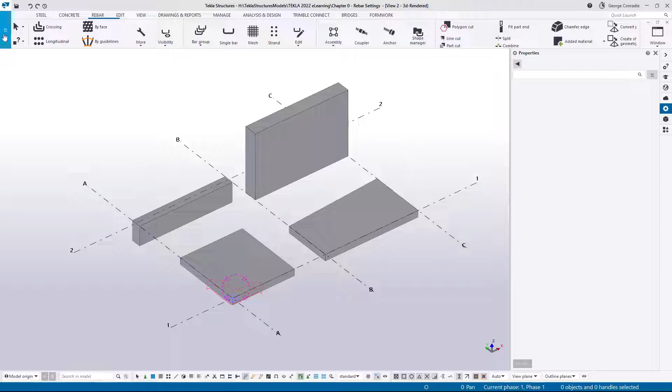Under the File menu, if we go to Settings Options, there are four things I'd really like to go through. The first one is clash detection - the check on cover and the check rebar on rebar. And then I also want to go through the three tabs of the rebar sets.

Now, the cover and locations we haven't dealt with yet - I'll discuss that in detail. On the general, I've discussed that a little bit, but I'll do a bit more detail on that in this video. On the rounding and tapering, I've actually done an in-depth video on that, I think chapter 6, video 4, where I deal with tapered slabs. I've done an in-depth discussion on how these settings work, so I'll do a brief explanation here, but please go see that video, chapter 6 video 4, for an in-depth explanation of how to work with tapers and slabs.

With that, what I'd like to do is start with the clash check. I think if we isolate, we just need this slab for this explanation. So I'll grab that slab - let me just make sure that's select all elements. If I grab that slab, right click, fit work in all views. We've got our slab isolated.

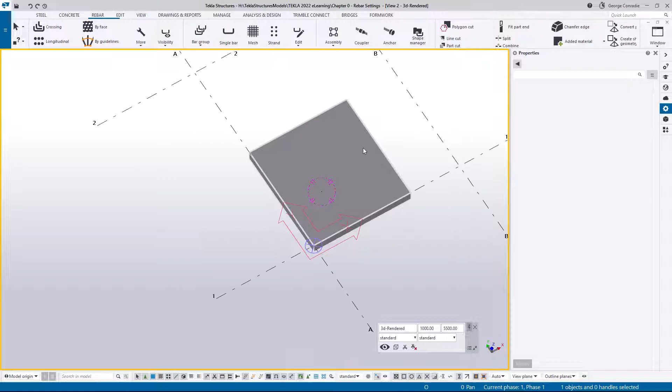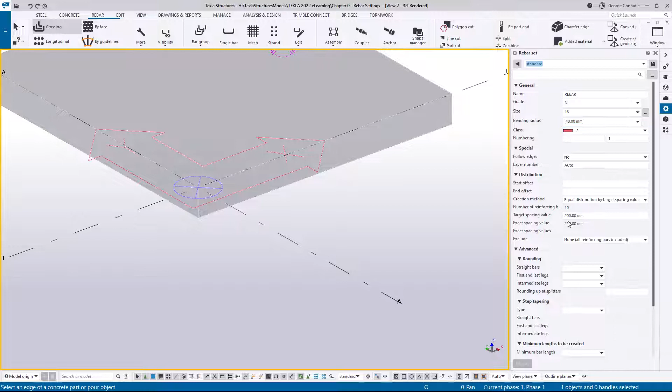What I'd like to do is the rebar sets and the rebar groups, because they work slightly differently. If I select the rebar set and I just load my defaults - and I think for this exercise, maybe we go to a 16 bar because it just shows up better in the video, 16 millimeter main. I'll make it red, that's fine. And the spacing I'll go 300.

I'll hover over the edge of the bar, pick the top, the side, and the bottom. I'll leave that one open. And before I accept the bar, I'll actually pull this back to say 600 mils, just to create like a U-bar type of bar, edge reinforcement U-bar. And then I'll say OK - that will create the U-bar with 600 legs for us.

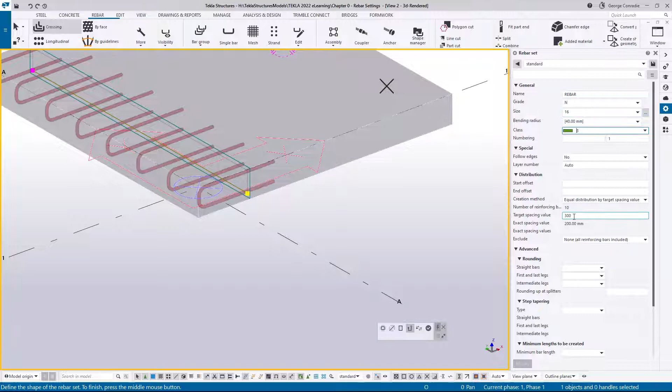While I'm still in the command, I'll just hover in this direction and pick the bottom. For the color, I'll just make it a different color, say for instance 3. I'll pick the same size, 16. Distribution 300 is OK, and then before I accept that, I'll just go adjust guideline and pull this edge of the guideline down to the edge of this reinforcement and say OK. So it creates 3 bars for us on that U-bar like edge reinforcement, for instance. It's just a simple example, but these are rebar sets now.

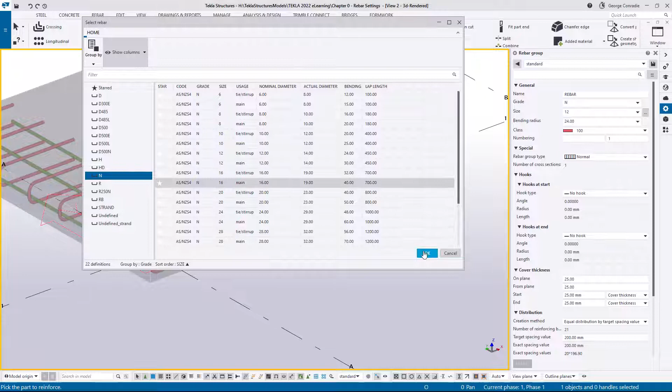Now on the other side, what I will do is go for group, so rebar group, and again just load my default settings. I'll go to the 16 main to keep it the same. Let's keep it the red bar. Then for the cover, 25 is good. For the start and end, what I'll do is actually force a leg length here for the first and the last - I'll force a 600 by 600 leg for the start and end leg. And also the spacing is 300, just to suit the other side.

I'll pick the reinforcement slab and then I'll just draw a bar shape that looks like a U. I'm not too worried about the legs because it's going to be overwritten. Middle mouse click, and then for the spacing line, I'll just pick this edge of the slab to the opposite edge, and that will now create a U bar, same as the other side.

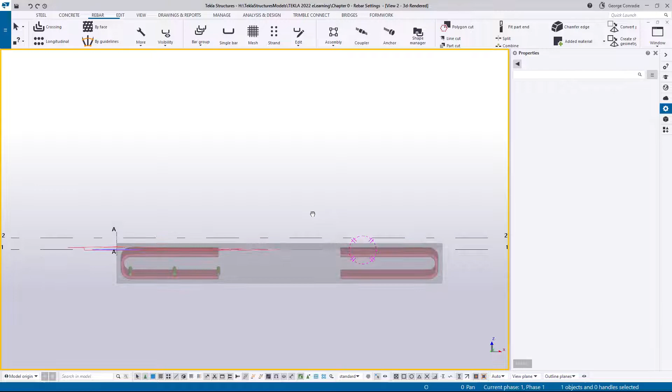Now for the straight bar that sits on top of it, we can just engage the rebar group again. In here we'll have to go 25 as a cover, and this will be 25 as a cover again. And then for the on-plane and from-plane settings, we'll deal with that now.

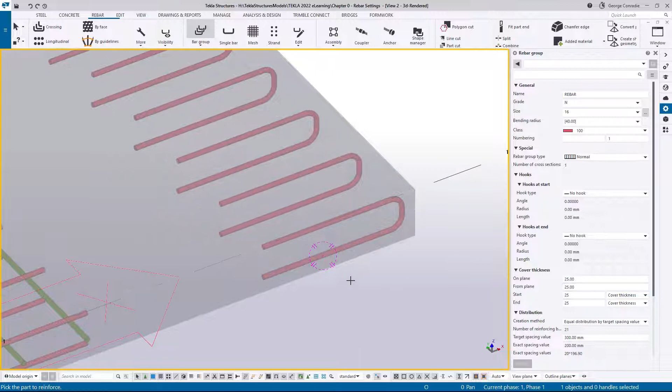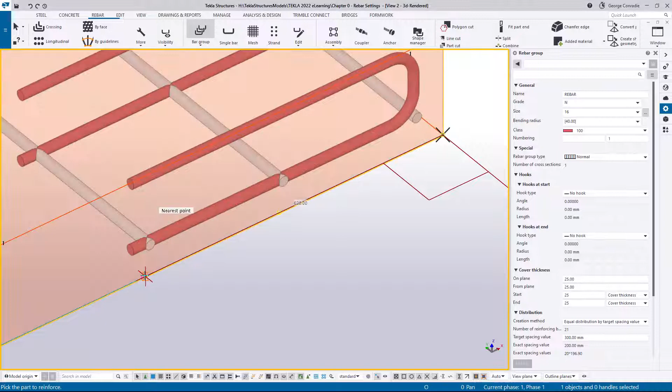So what I will do here is actually say we want to reinforce this concrete. We want to go from this edge of the concrete to the opposite edge, perpendicular. Middle mouse to accept the shape. And now for our spacing line, once again we will go from this edge all the way to 625. Right, so that will give us that.

So now if I click on this, here is already an indication of the power of the rebar sets, because it does automatic layering for us. With rebar groups, we've got to manually do it because it's governed by the cover that you plug in. So first of all, we'll adjust the height - we need to add 19 millimeters to the cover of 25, so that gives us 44.

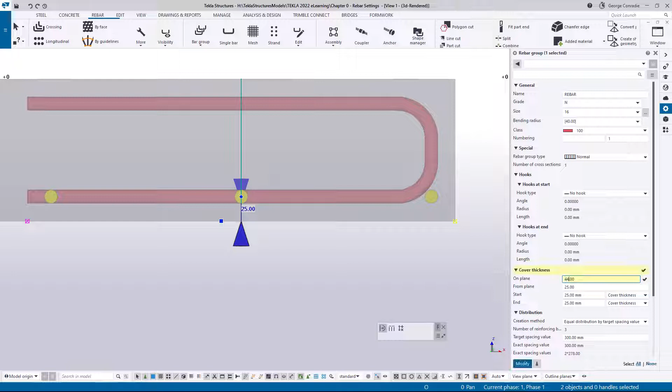So if I say the on-plane setting is 44, enter, that will pick up the bar so it sits exactly on top of us. And for the end here, I'll do a space 0 there to address the end of the bar, so it puts it right on the end there.

And for this side here, I'm going to do 25 cover plus the 19, that's 44, plus the 40 is 74. So if we change this 25 to 74 and enter, that will result in exactly the same between the two bars. We can see there, apart from the color.

So let's fix that up right now and make that green. Okay, so we have very similar reinforcement there in rebar sets and rebar groups.

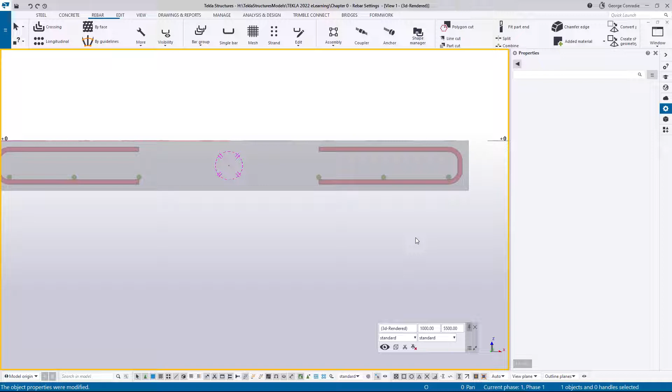A note here is that rebar sets get their concrete cover from the concrete element. So if I click on the concrete element, you can see that the coordinate system is global and it's got blanks here, which means it's relying on default settings.

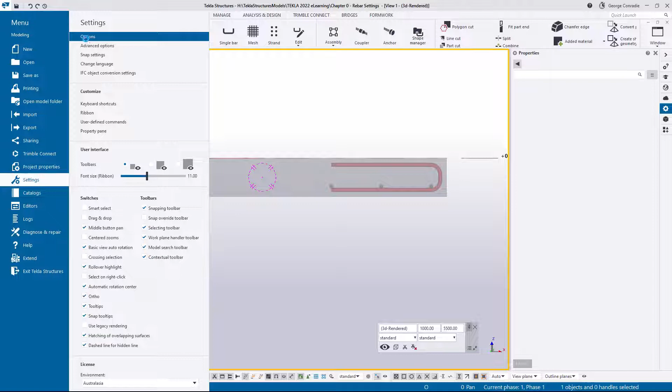And the default settings for the cover will be under settings, options. And if we go to rebar sets, covers, it gets its values as a default from here. So if you don't plug something into your property pane, it's going to drag these values across. And for the rebar group, it's getting the cover from whatever you fill into the rebar pane. That's the main difference between these two in terms of cover.

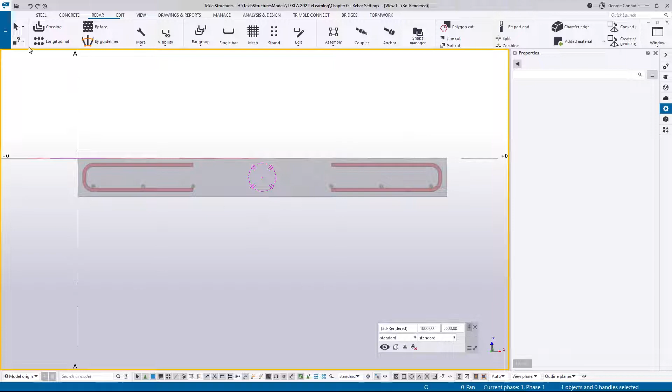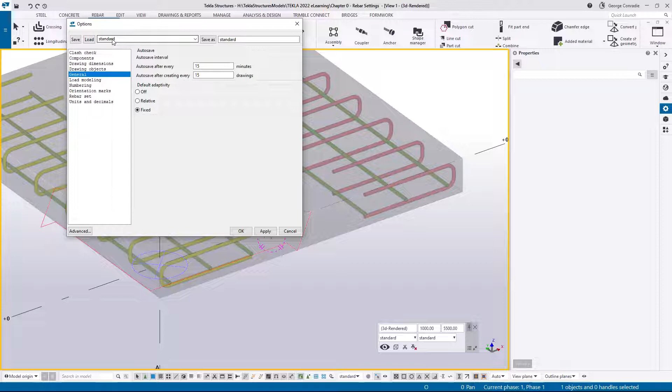In terms of clash detection, they work exactly the same. So what I'm going to do is grab the settings, go to options, and make sure that indeed I've got my standard environment files loaded. Just want to check it and it's okay.

And I just want to make sure that I regenerate my reinforcement to make sure that everything complies. Okay, so we've got 25 cover at the moment, but we want to do a clash detection on cover. So how do we do that?

First of all, cover is from the bar, and this is the outside bar. I'm just going to check those two bars. And it's a cover check with the concrete, so we pick the concrete as well. So if we go here, we've got one slab and we've got two rebars, one being a group and one being a set.

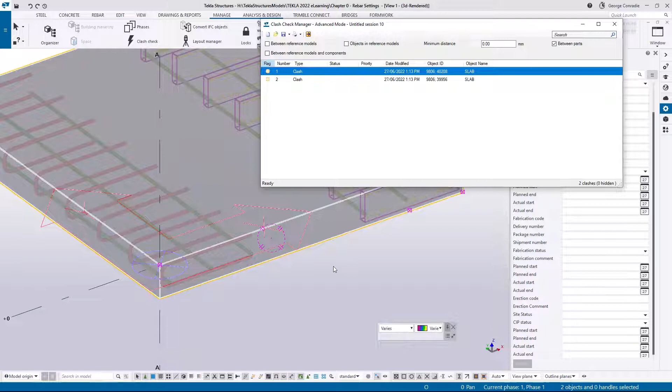So what we can do now is hover over to manage, go to clash check, and say check these. It's going to come up with a clash, two clashes. The first clash that it's highlighting is the rebar group clashing with a slab.

And the second one, if I click on that, is the rebar set clashing with the slab. So if it's not actually touching the slab, how is it clashing? Now we know when we created these bars, we plugged in a 25mm cover.

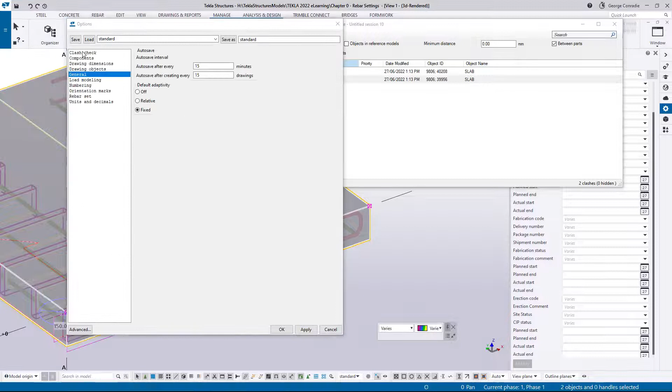If we now hover over to the settings tab and go to options and clash check, and we have a look at reinforcement bar cover thickness, at the moment there's a 35 plugged in there as a default.

Now 25 is less than the 35 we're checking against. Therefore, Tekla is highlighting the fact that you do not comply with the cover that you are checking for. And that is why the whole bar is actually in a box and not just a connection.

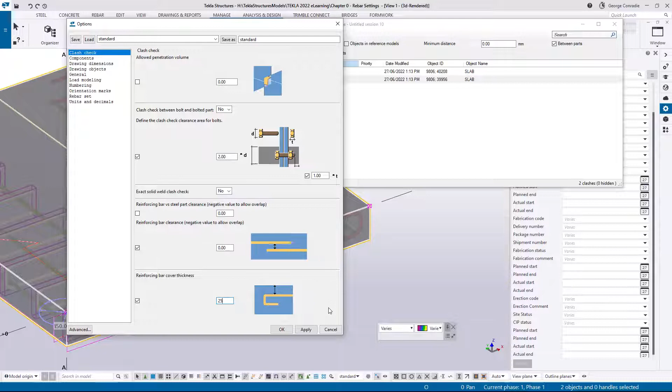So if we change this value to 25, which now suits our new cover, apply, OK. And also remember, you always have to do a regeneration of the rebar sets.

So if we regenerate that, and we now just make sure that all three of those are selected, let me just reselect them, and also this one, yeah.

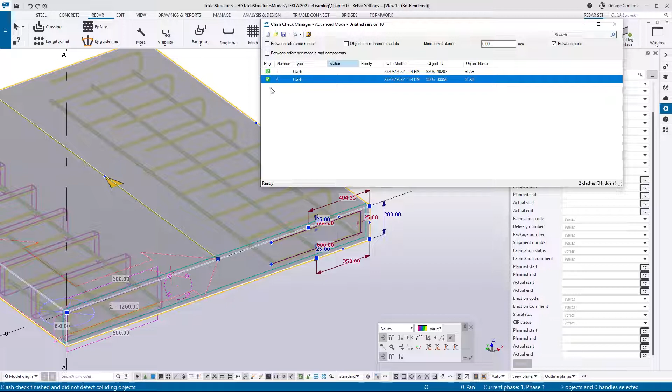If we now take those three again and just say check them, now all of a sudden we've got the green flag. It says everything is okay because now we're complying with the cover. I'll cancel out of that. So if you do a clash detection and get your whole bars covered in a square, it's normally an indication that you are checking against cover and your cover applied on the bar does not match the cover you're checking in your clash detection.

The second thing I want to check is rebar to rebar. So if we click on this bar and this bar, and also this one and this one, so all four of those bars - I didn't hold in my key when I selected them, so let's just pick them again. We've got four reinforcing bars here, four objects.

If we now do a manage and a clash detection between them, we run the clash check, and we can see again we've got two clashes.

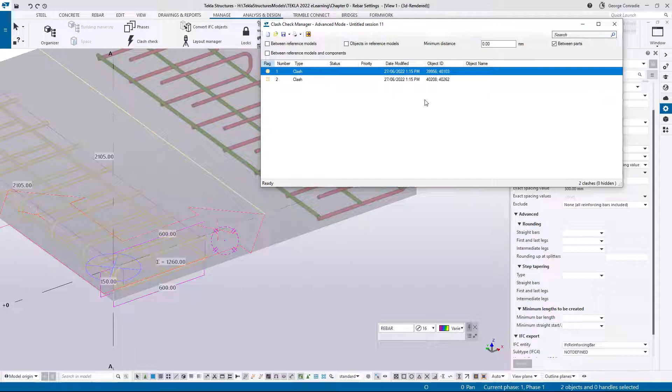We've got this bar clashing with that bar, and if we go to the next line, we've got this bar clashing with this bar. Now if we go to the settings once again, options, and we look at the clash check and this line, it says it wants to check for 0.

0 between them. Now these bars are lying on top of each other. In other words, there's absolutely no gap, no space between them. So they're not overlapping, but they're touching each other. Now according to this, that's a clash. So if we change this, it says here negative value to allow for an overlap.

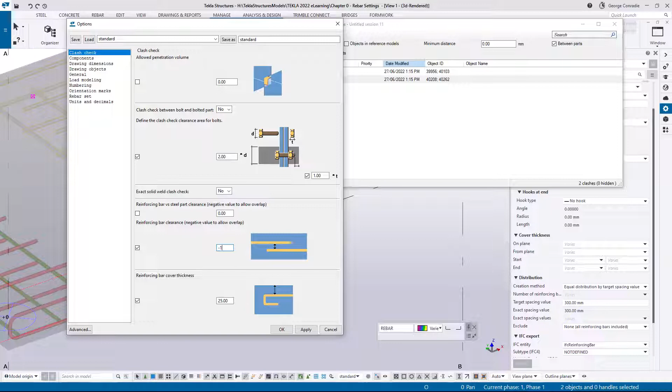So if we just say, look, it's not critical because reinforcement has deformed ribs on them, deformed bars. They could physically overlap by at least X amount of millimeters, which you can decide. But if I plug in a -1 there and say apply, okay, and go back to rebar and regenerate my rebar sets, yes.

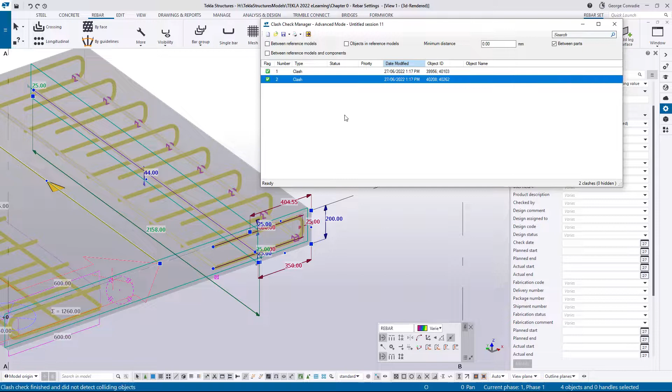And then I make sure that I pick all my bars again, like so, and I just rerun this clash check. You'll see now we have solved all our problems in terms of the clash check. You can now see that on this side there's no clashes, and on this side there's no clashes. It shows a little thing there, but I think it's just a leftover from the previous run.

So if we just close that off, we just pick this one and this one. Sorry, let me pick the bar properly. This bar and this bar, and we do a clash check just on that one. Say run. You can now see there's no clashes. It doesn't list anything, so there's no clashes.

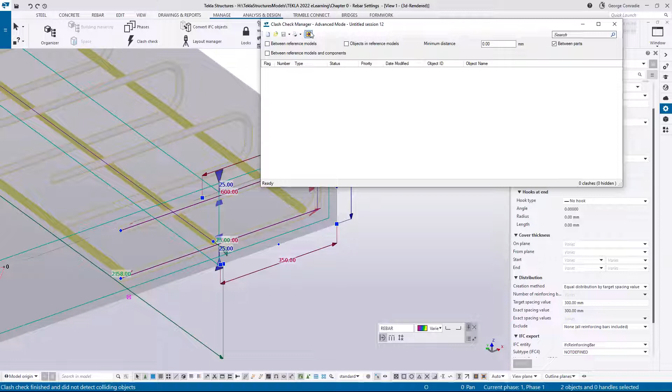So that is how you resolve the clashes rebar on rebar, is to allow for a little bit of overlap. Rebar is not an exact science. There are ribs that are going to be overlapping a little bit. So if you plug in a sensible value there, you'll see that you won't get any clashes there.

So moving on to the next setting. So for this, what I'm going to do is I'm just going to select all the rebar because I don't need those anymore. I'll delete them. And then what I'm going to do is I am going to put in a new rebar into the slab because I want to look at the description of the rebar, the layer description.

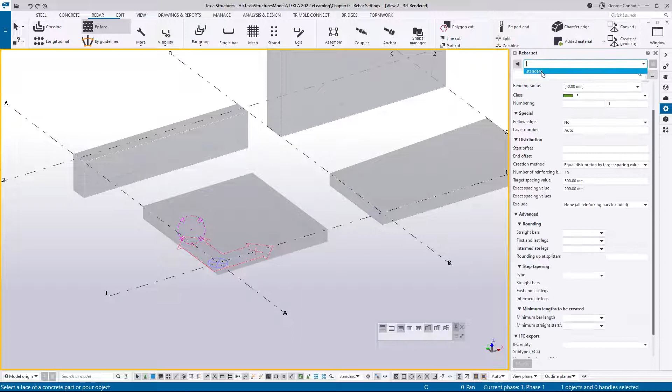So if I go to face and I'll load my standards again, my default standards, I'll make this a 300 spacing just to get the bars a bit far away. And then what I'll do is I'll go for near side and I'll go both directions. Actually, let's go single direction. So if I hover over the slab, let's pick that direction, and then I'll go far side, pick the same direction.

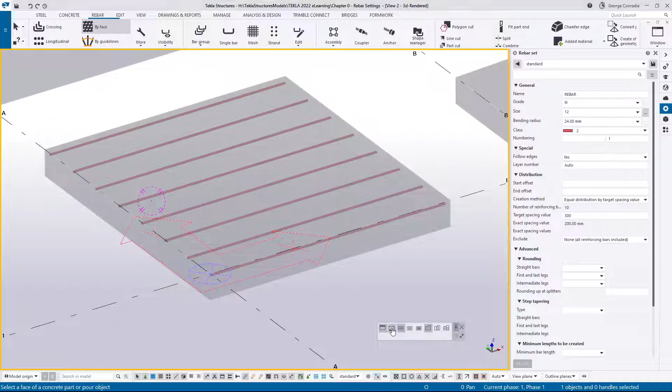And then what I'll do is I'll go over and change the color. You could put them in as 2 layers in one go, but the way I'm doing it I can change the color. So what I'll do now is I'll just pick the other end. So if I go over here and then pick the near side, pick over there. So that takes care of top and bottom in different colors.

And now what I want to do is change the color once again to a 4, which is the dark blue color. And for the creation method, I'm going to pick a number, and the number of bars I want is 1. I only want 1 bar on the side. I'm going to place a side bar now. And then I know this is a 200 slab, so if I want a bar in the middle, I need to give it a start offset of 100.

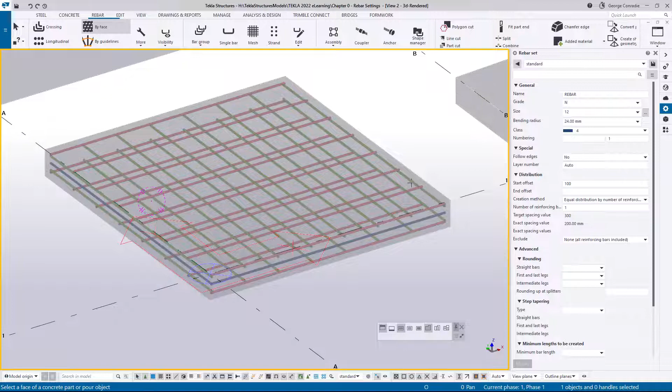So now if I hover over this and make sure you're on the far side, you can now see the direction is different, so we'll just swap the direction over. So if I put a bar in there, you can now see the single bar that comes up on the side, single bar. And if I hover this around, pick this edge, single bar.

Oh, I picked the wrong side. Let me just fix that up quickly. And then on this side as well, let's just pick this one. Okay, so now I can just go and grab that bar and delete it. Okay, so now all those have been created.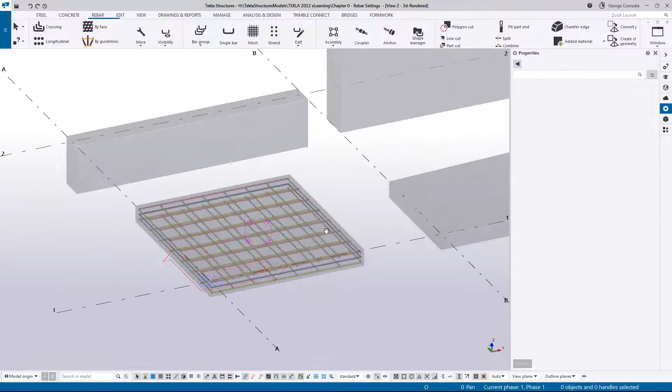So what we need to look at now, and what I'll do for this is I'll actually open our options tab and go to rebar sets and keep that open there, and I'll move the slab over to here. So let's start at the bottom, and also I'll go over to the custom inquiry.

Make sure that you select the rebar inquiry form. And if we select the bar at the bottom, the red one, and we click that, you can see it's getting a layer B1. So where does it get this B1 from? Bottom one. It's whatever you set up in.

Now remember, these concretes were created with the global coordinate system, so it's going to refer to these values in these boxes. If you had the local coordinate system, which I'll explain in a minute, it will refer to these tabs over here. So it's picked up the bottom as a bottom. The 1 comes from the layer, and the layer comes from the prefix.

This layer attribute constitutes a prefix and a layer number, and I might just show you. Go Control E, and once you get your advanced options, you type in your layer and you say in all categories, this here, and maybe I'll just drag it over so we can see the value. You see, this is the setting for that layer.

And what we say here is give us a layer prefix and a layer number, and it concatenates the two together to give you that format string. So that's where the B1 comes from. So if we select the green one at the bottom, it's getting the bottom layer again, but this time layer 2. If we do the top, it's T2. If we do the opposite direction, T1.

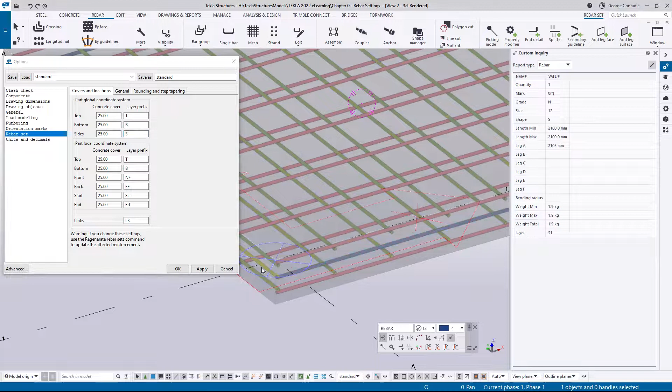And then these refer to the side because we said the sides should be labeled with an S. And because there's only a single layer there, it's always going to be S1 right around until we put a next layer in there. Now, that is all because if we click on the concrete and go to the property pane, in our coordinate system we've got global. And the values for the cover, if you don't overwrite them in the property pane, it's dragging them from here. So that's how that works.

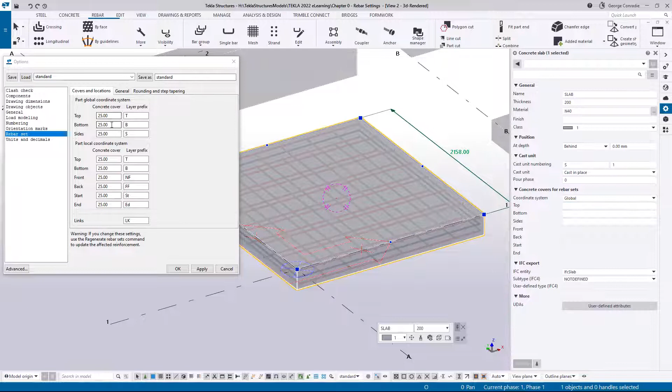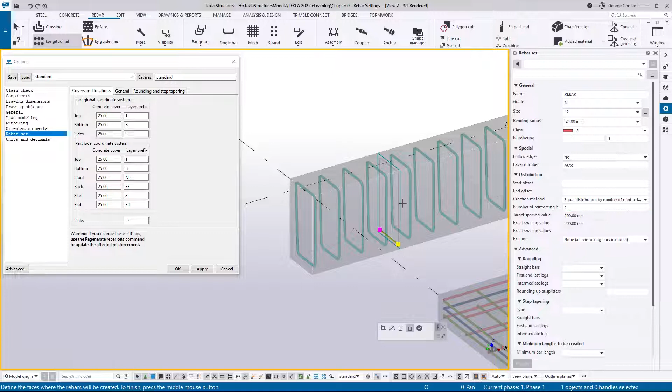So I think what I'll do is the beam next. So if we go a crossing bar, we can just load our standards, and then I like to use a 5 for a ligature. So if we click on a ligature, select all the sides and say OK, it's going to grab a ligature there. If we now say give us a longitudinal bar, we can say instead of target, give us a number, and the number of bars we want is 2. Then we hover over the section, pick the bottom and the top and say OK.

And then for the sides, I'll change the color to blue. For the distribution, I'm going to say give us a number, and the number we want to create is 4 bars, but we are going to omit the first and the last bar. So now if I select over the section, pick that side and this side, and say OK, we're getting our 2 bars because the top and the bottom have been omitted. So that pretty much deals with the beam.

So let's have a look at what's happened here. If we look at the bottom reinforcement again and go to our custom inquiry, our rebar, we can see that we've got B2 listed, which is correct. It's a second layer bottom. If we click the top one, it's T2, which is also correct. And again, it's getting it because we've got a global plane orientation. If we look at the ligatures, it's coming up with LK.

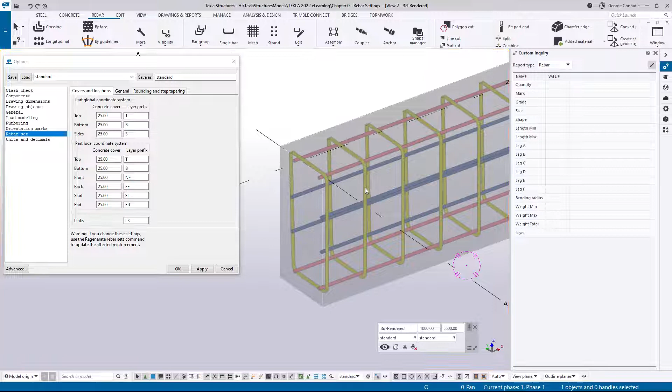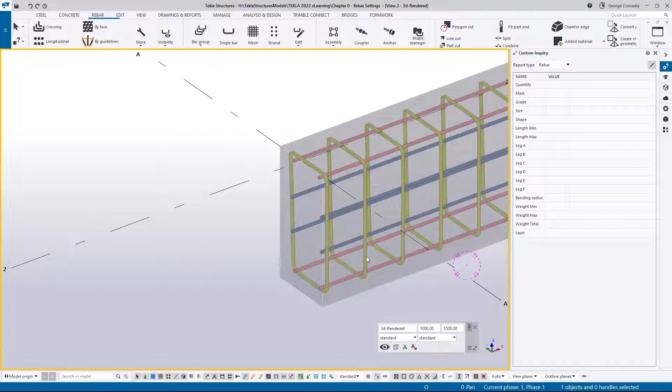Now, LK, you can see links, is on a tab of its own because this is common to local and global coordinates. So it doesn't matter which system you're working in for your concrete, which we'll explain in a minute. Links are going to be defined as LKs or whatever you plug in there. If you want to change this, for instance to LNK for whatever reason, you say apply, OK, and we go modify, regenerate. If we then select the link, you'll see it will change to that value.

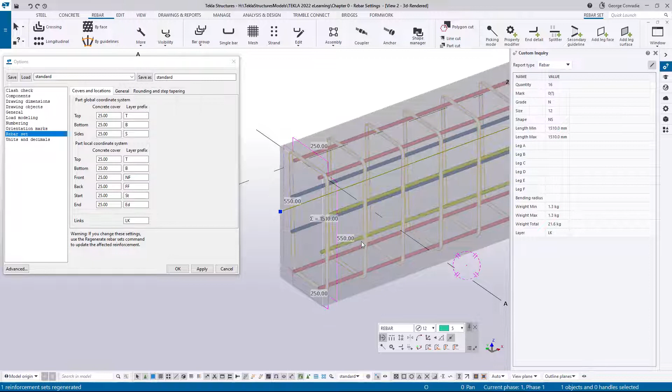But in this case, we don't really want that. So I'll just go to options and change it back quickly to LK. Well, I won't even apply. I'll just regenerate from here so we can keep that open. So if I now select that, it's back to LK. So the blue bars are obviously side 2 because it's now the second layer. The ligature is the first layer, but it's a side bar, and that will be the other side because of the global system.

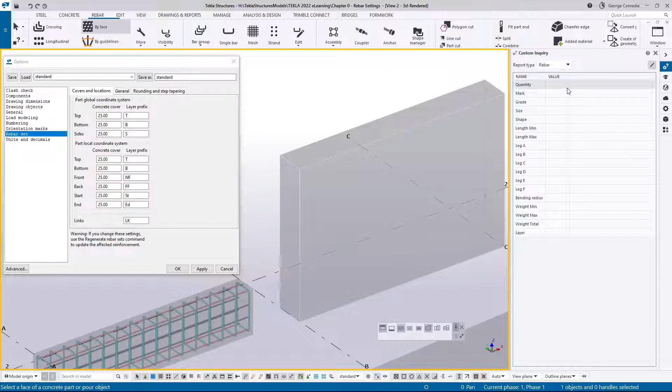Now let's have a look at walls. So if we look at walls, and I'll go crossing bars in this case. Actually, no, let's go by face. And if I go again and load the standard reinforcement, and this time I'm just going to be quick. I want to pick both sides, and I'll go near face, and I'll pick this edge for the main. And then I'll go far face, and I'll pick this edge again for the main.

And then, like before, I'm going to say give us a number of bars, give us 1 bar, and this is a 400 wall, so let's start 200 off the edge, and let's change the color to blue, and we will go for a single bar near side. Then I'll hover over here and put that single bar in there, and I'll flip over just for the sake of it being easier. I'll put a bar in there, and then I'll put a bar, and now I've lost my command. So let's just put a bar in here as well, like so.

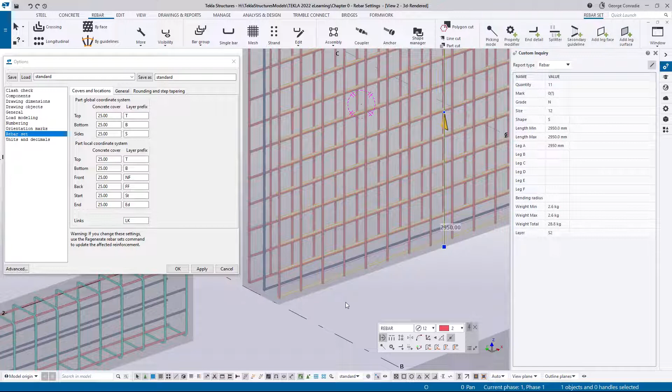Okay, now that we've got the wall done, the issue here is we would be expecting this to be near face layer 1, near face layer 2. But if we click on it, we go to custom inquiry at rebar, it's coming up with side again. And if we click on that, it's coming up with side 2 again. And if we click on this one, it's coming up with side. So what's the issue here?

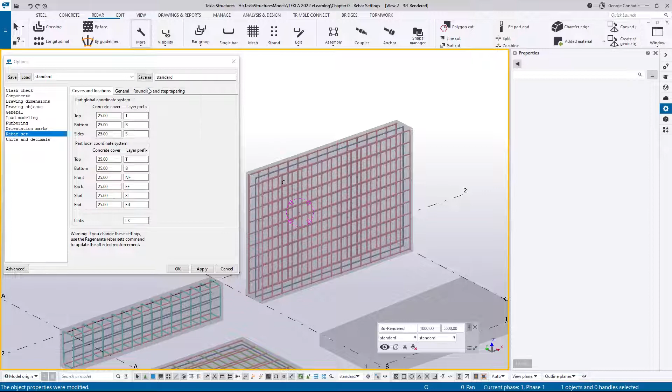Well, the issue is that if we look at the coordinate system for a wall, you really want to be in a part local coordinate system. You want to be dealing with top, bottom, front, back, start, and end values in the wall. So to achieve that, you click on the wall, change your plane to local, and say modify. As soon as you do that, you can then go more, regenerate the rebar. You say, okay, so it's regenerated that. So now let's look what we've got.

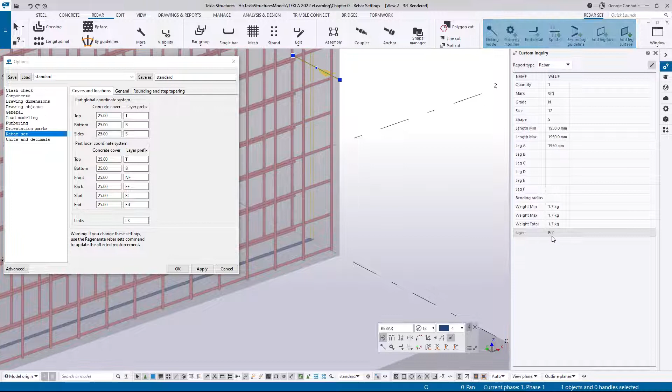If I click on this, under our custom inquiry we've now got near face 2. If we click on this one, we've got near face 1. And on the opposite side, we've got far face 2 and far face 1. If we look at this bar, it's defined as start 1. And the opposite side is defined as end 1. This one here is defined as bottom 1, and the top is defined as top 1. So where does it get the start and end business from?

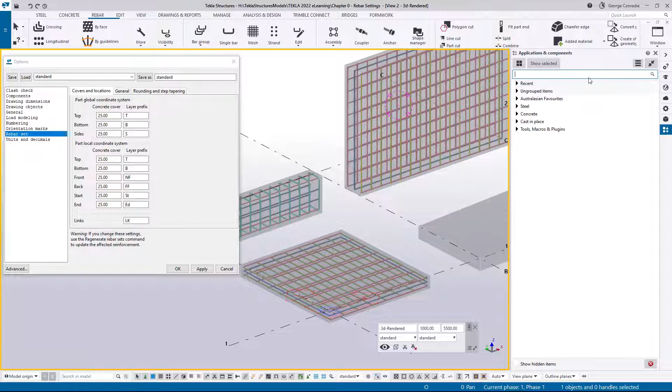The quick answer is that if we go over to the applications and components menu and you type in show, there's a little macro that sits here called show coordinate system. This shows the local coordinate system for a part. So if I double click on that and hover over the concrete of the wall, you'll see Tekla will draw a little localized axis here. If I double click again and click on the beam, we get the localized axis for the beam.

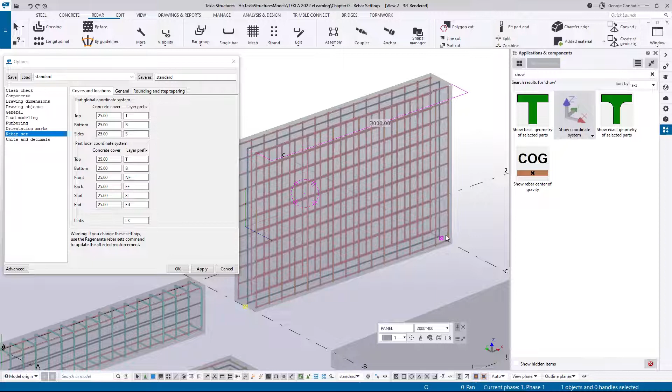Let's leave the slab for a minute because I want to change the slab and show you how it's changed that. Now, in terms of forming a part, if we click on this part, and I put off the direct modification, you can see we've got a start and an end grip here. That is the direction of the positive axis, the way you've put it in. That is why that red line is going start to end. So that's positive X. In terms of a wall, your Y points to the bottom and the top, and your Z points to your near and far faces. On the slab, it will be top and bottom.

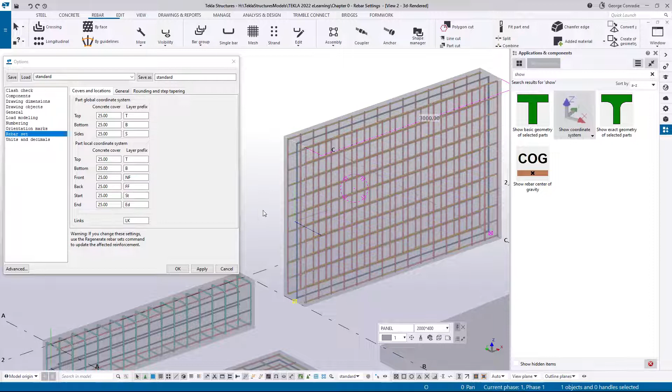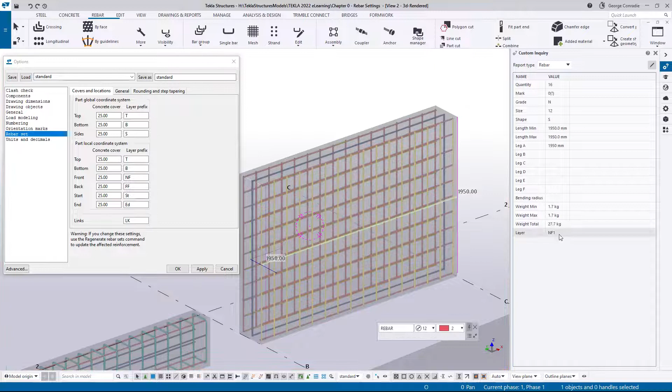So if you look at your positive X-axis, this is your start side. That's why in our custom inquiry we get a start here. And the end of the axis is your end. The top of your Y will be your top one, and the bottom of your Y will be the bottom one. And then your Z, which is the blue axis, will host your near and far face settings. Now, in terms of a beam, it's the same. If you click on the beam, there's your start point and there's your end point. That's why this red axis is pointing that way.

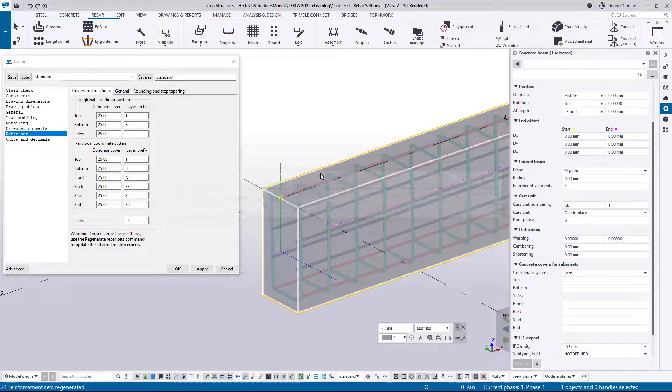And then obviously, if I had to take this beam, remember that these blue lines are its start and end. But if I had to take this beam, go over to properties just quickly and change this to the local coordinate system, and I say modify, and then let's just regenerate the reinforcement. Yes. If we now look at the blue and go to custom inquiry, we're not getting a side anymore, we're getting a near face because it's now applying local coordinate rules.

It's now applying this part local coordinate system. The values you've plugged in are now applied to this beam. You wouldn't do this. A beam should be on the global coordinate system in terms of its layer prefixing, but it's just to explain where all this is coming from. So that's your far face. This remains the bottom, that remains the top because of your y-axis orientation. And this, because it's a ligature, a closed loop, will be a link because it's common to both those areas.

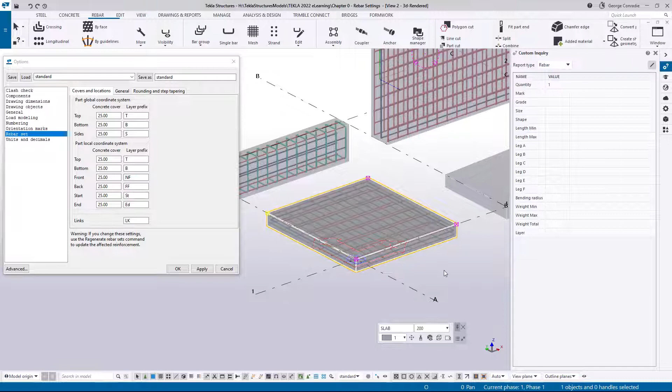Now, in terms of a slab, a slab works differently. If you look at where the yellow is, I know when I drew the slab I started here, but I can't remember where I clicked as a second. Did I go clockwise or anti-clockwise? So what we can do is go back to our little macro and click on the slab, and that sorts that out for us. So we know we've started here because of the yellow icon, and we've gone this way. You can see the positive red axis is this way. So that will be node 2, 3, 4.

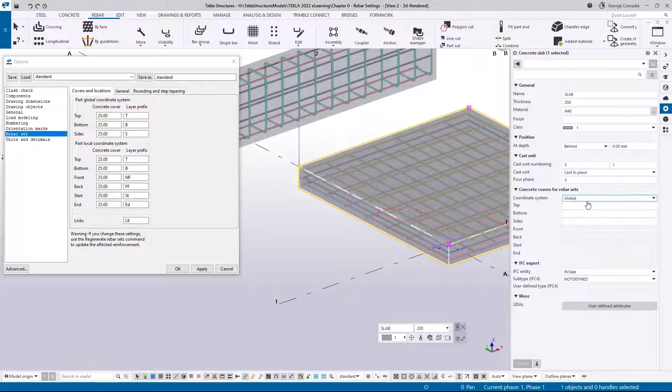Okay. So with that in mind, if we take this slab, go to the coordinate system, also change this to local and say modify, and then go to more, regenerate rebar sets. Let's have a look at what's happening now. Remember, this was top one, top two, bottom one, bottom two, and side one all the way around before. So if we go to the custom inquiry on rebar and click on this, it's now got near face. Why? It's now looking at the z-axis for orientation, and at the part local coordinate system.

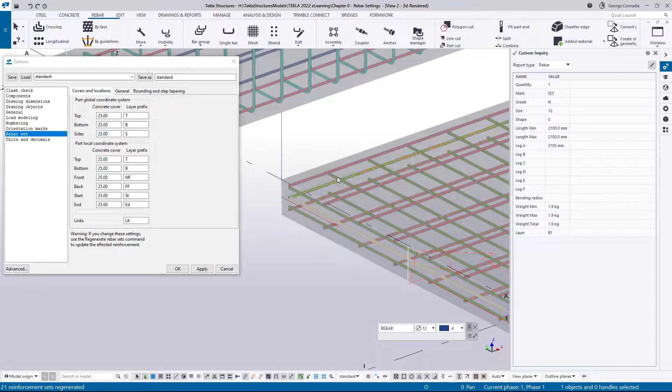So that now becomes your near face, the bottom becomes your far face, and this now becomes bottom one. Why? Because it's the bottom of the y-axis. The y-axis is that green you see in that direction. So that side should be your top now. And this should be the start, which it is, because there's your orientation along the x-axis, and this should be your end. So it's just a bit of an explanation on how these work.

I hope that's clear. I know it's a lot to take in and get your head around, but it's actually very simple once you understand how it works. And you could use those coordinate axes to not only specify different covers, but also drive your layering prefixes so it makes it easier on your drawings.

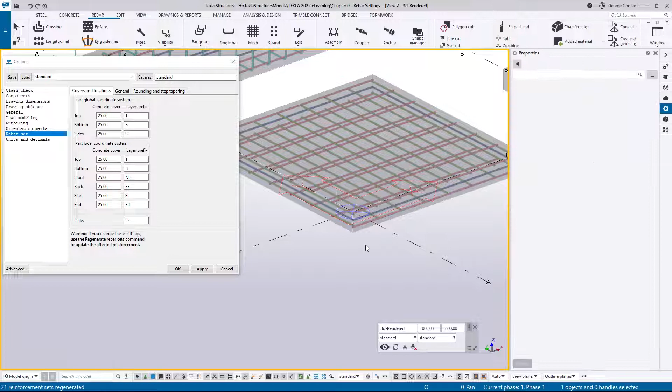So let's move on to the next setting, which is the distance. For that, I'm going to go Control P. I'll double click on my reinforcement and just wipe out all of those because we don't need them anymore. And I also want to make sure that these parts are all back to the global system. That one can stay local, but I'm not going to use it, so I'll make this global as well. Modify. Okay, so that is back to the global system. Now I'm going to make a change here just to illustrate the point.

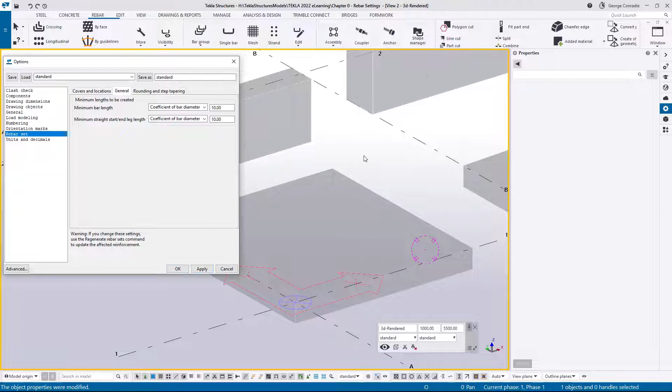Prior to Tekla 2022 for the Australasia environment, these were set to coefficient of bar diameter and 10 times. So it's 10 times the bar diameter. I'll apply that. If we now go to a crossing bar and load our standards, which is just a normal 12mm bar, and I think the rest is right. I'll maybe just increase the spacing to 300 just to split the bars a bit.

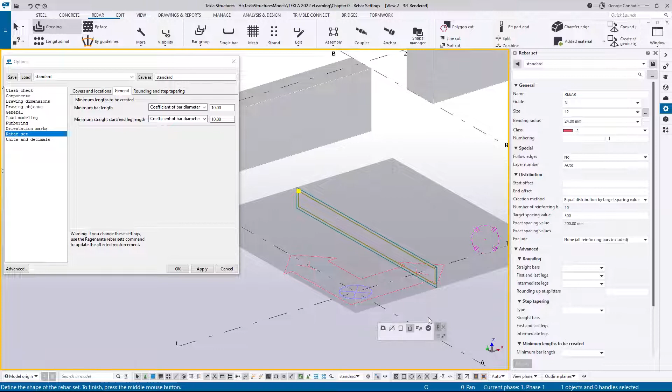If I now hover over the edge of this slab, accept all the edges and say OK, look what's happened. Tekla's drawn a start leg, an intermediate leg, another intermediate leg, but no end leg. And why did that happen? Well, it's very simple. In the settings we're using, for the minimum bar length, that's the total bar length, the minimum length we can have is 10 times bar diameter.

And that is easily exceeded here because this is quite a long bar, so no problem there. If we look at the second line, it says minimum straight start end leg length. So the start leg, which is the top leg, is more than 10 times bar coefficient. That's why it's drawn it. But if you come around and you end up with this vertical, it's not enough bar there. There's not enough length there to satisfy this condition.

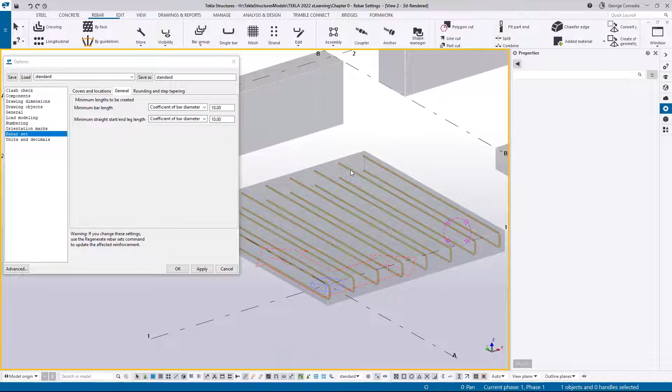Now, we can change it in two ways. We can either change the value here and regenerate the bar, but that will have a global effect. It will change all the bars to comply with this rule. Or otherwise, what we can do is we can click on the bar and change the value in the settings. Now, I'll just show you that both of them work.

So in this case, we want to address this. So we want to make it a distance, and I want to make it a distance of 0, which says any length goes. Create a bar leg irrespective of length. And I say modify, and just like that, we now have our bar length. Tekla is now happy with that.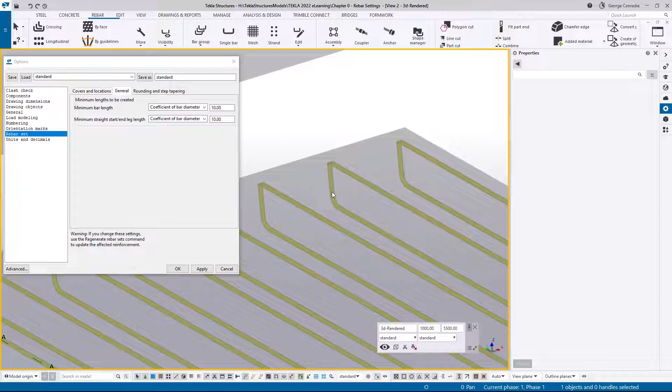So whenever you create a bar and you're missing a leg, go and look at your rules regarding general in here. Ideally, and we have changed it for our environment, Australasia environment, from 2022 upwards, it is now distance for both of them, and it's 0 for both of them, and that's the correct way of doing it.

So I'll apply OK. So now with that applied as OK, if I now go and say give us a crossing bar, and I'll hover over this side and I say OK, it creates all the legs for us in one go. No problem with that anymore. So that pretty much takes care of that.

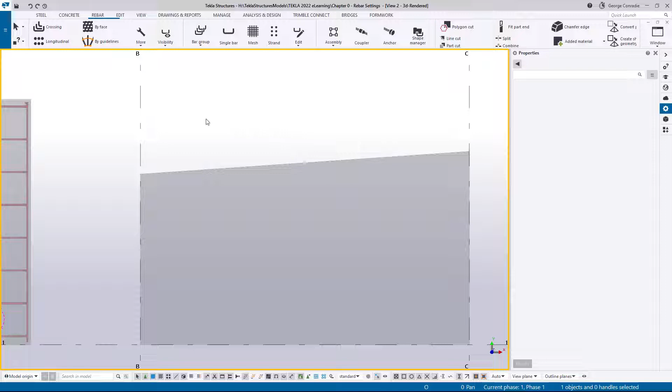Now, lastly, what I want to address is just tapering. Now, I did say before that tapering is dealt with in detail in chapter 6, video 4, but maybe what we'll do is just quickly point out a few things. So if I click on this slab and I pick only the bottom and I say okay, if we now look at this from the top, we can see that there's already a bit of a taper applied to these bars.

Now, if you have a slab that's very slightly sloped like this one, you might not want this because this is really excessive cover over here, and maybe the engineer will have a problem with that. He says, no, I really need some reinforcement in here. The way to overcome that is if you click on the bar and you go under tapering, you'll see nothing has been filled in.

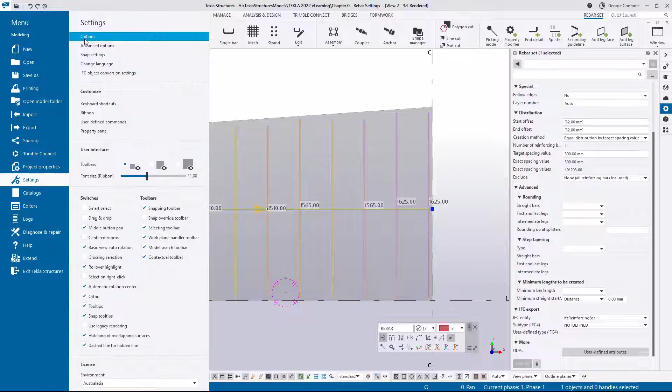There's no settings there. So obviously, if there's nothing in the property pane, it's getting its values from the default settings, which is under options. And if we go to rebar sets, under rounding and step tapering, it's this. So for straight bars, it's 50. Start and end leg, it's 50, and intermediate, it's 50. So Tekla is dragging those values. So these are all straight bars, so it's applying a 50 millimeter taper.

So the workaround for that then is to click on that bar and go to tapering, do not apply any tapering and say OK. And just like that, we now have tapering following the edge of the slab.

If, however, this is a very long slab and you do want to split these bars, and also maybe just here before I actually do that, I'll make a quick setting here so we can see the effect of it. If I go back to rebar sets, rounding and tapering, I'll just change this to 1. Apply, OK. And then also just regenerate the bars.

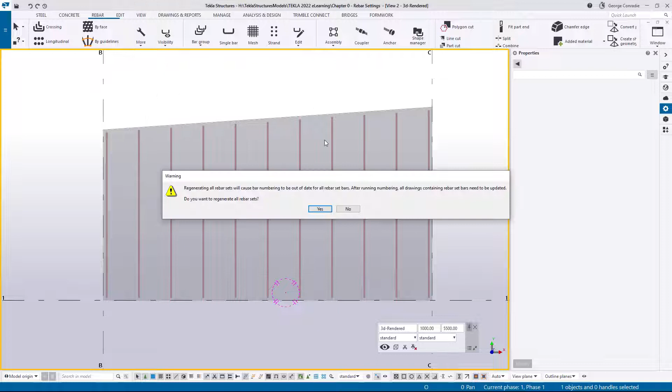Yes. So if I click on this bar, and maybe just move this out of the way a little bit before we split, and then go to splitter, make sure we load our standards, and then just hover over any distance there, and we split the bars.

Now, there's two things that come to play here. The first thing is if we look at the bars, you can see if we click on the bar, it's 952, 1147, and these are constant at 950. So in the bending schedule, if we look at the inquiry, we're going to have 11 bars which are straight bars, and then we're going to have single bars all varying.

So we want to get rid of that for one instance. Second instance is we want to round these bars to 5 mil. So there's two settings we need to deal with. Now, the first setting is with the splitter.

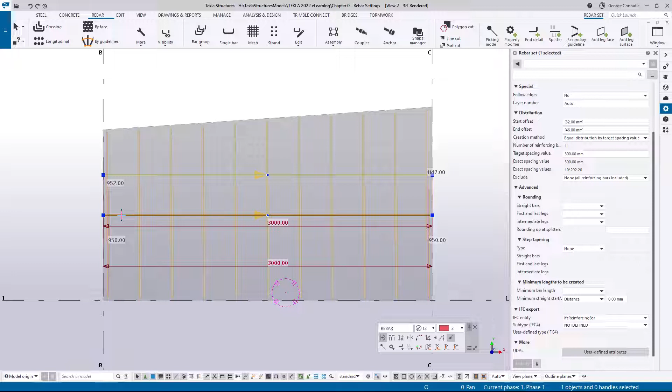Those bars got split to an accuracy of 1 millimeter because the splitter tolerance was set to 1 millimeter. So if we go back to the settings menu, options, rebar sets, rounding and tapering, and say rounding up at splitters, we change this to 5 millimeters, say apply, OK, and then go and regenerate our reinforcement.

Yes, override. And we now click on that bar. You can now see it's rounded up to the closest 5 mils on both sides, which just in terms of a straight bar looks much better than rounding to 1 millimeter. So the extra from rounding up is taken up in the lap length.

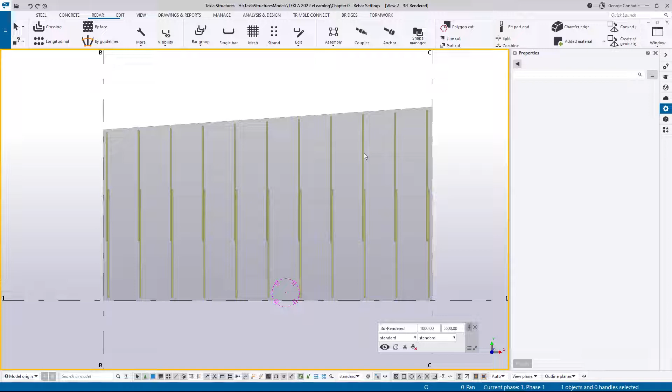The other thing too is that sort of addresses the next entry, which is splitter tolerance. So we're getting nice dimensions now. And the next thing we want to do is reduce the amount of reinforcement. So if we go to inquiry, we can see we're still dealing with all these. We need to reduce that.

So now we can click on the rebar set, go back to the taper that was set to none, and say no, actually do give us a taper on this one. And it's straight bars we're dealing with, so give us a taper of 50 millimeter and say modify.

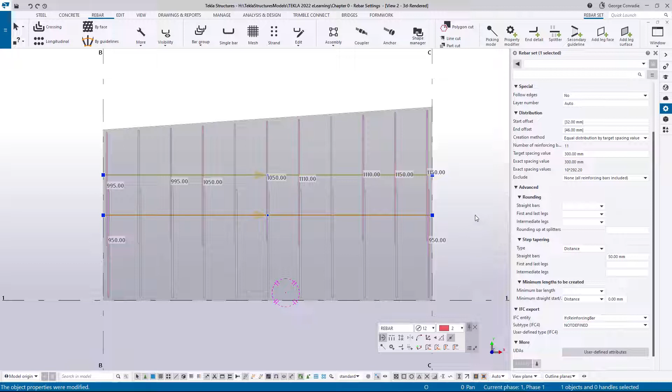Now you can see because there is a splitter present in the set, Tekla adheres to the slope distance and maintains cover. And the actual taper tolerance or step tolerance is taken up in the lap itself.

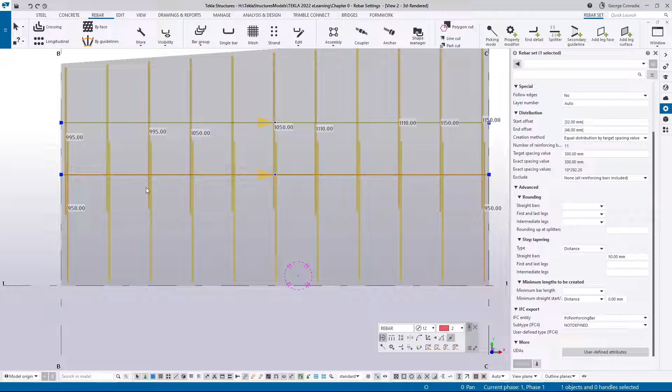Again, there are several settings you can play with here, refer to that video I did. At the moment it's set to 50 millimeters, which means this one will have the minimum. If I click on the splitter and look at this value, 450, this one will comply with 450. And 450 plus 50, these must be within that range. Otherwise it creates a new group.

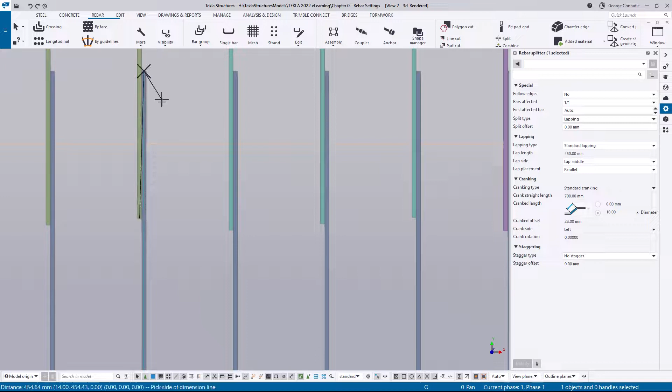So maybe just put on the group coloring so we can see it better. Again, if I take a measurement and measure from there to there, you can see that's got to comply with 450 at least, and this has got to be within the 450 plus 50, in other words not exceeding 500. If I click on this one, I'm not exceeding 500, but the next one will definitely exceed 500 if I look at the Y value here. That's why a next group is formed.

What I could also do is click on the rebar range and say instead of having a distance of 50, I can plug in a number of bars, and say I really do want to group 4 bars together, for instance. If I then say OK, and do a redraw, we can now see we've got 4 bars, the green bars, grouped together.

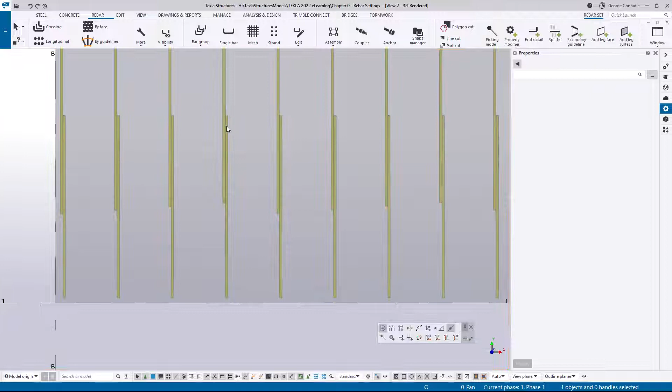Again, the shortest lap complies with whatever you click on the splitter line, whether it's reading from the rebar database file or whether you've plugged in a custom value. Whatever you plug in here is going to be the compliance for the minimum lap length, and the others are going to be within the tolerance of your step distance or your step number.

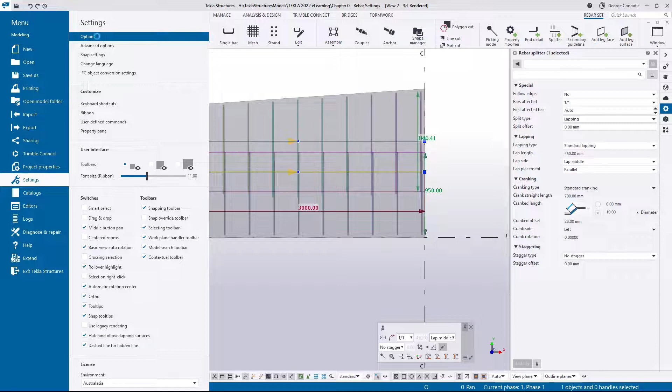So if we go back to our settings and quickly have a look at what's left here, we've pretty much dealt with the clash check, with checking your rebar cover and checking your bar on bar. And under the rebar set, we've looked at the local and global settings and your layer prefixes and how to manage those. We've also looked at the creation or non-creation of bar legs and why some bar legs don't get created.

And then finally, with the rounding and the step tapering, we looked at the step distances. We've also looked at the splitter. Now these are just purely tolerances, pretty much the same as what the splitter works, but just on the rebar itself. And by default, the straight leg is formed in increments of 5 millimeter, rounding down at the moment, and the last and intermediate legs are the same.

And the reason why these are rounding down and not up is because if you have a ligature and you're rounding up, you will encroach on cover. It's the same with the straight bar - if you're rounding up, you are going to potentially encroach on cover, and you don't want that. You'd rather want a little bit more cover than a little bit too little. So hopefully these are just the normal options for the rebar settings.

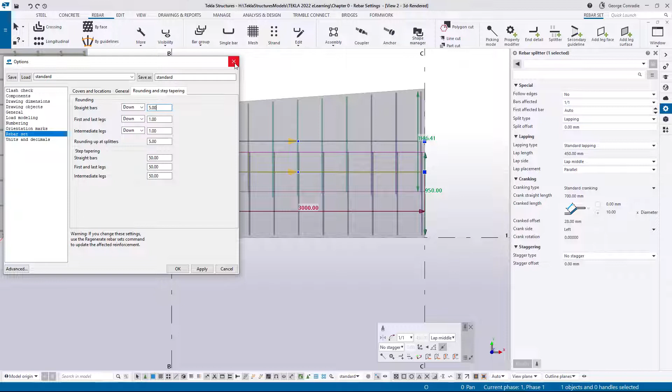In the next video, I'm hoping to deal with some advanced settings for rebar - in the Control E, or if we go File, Settings, Advanced Options, we'll be looking at what's going on in this dialog box. Thank you for watching.